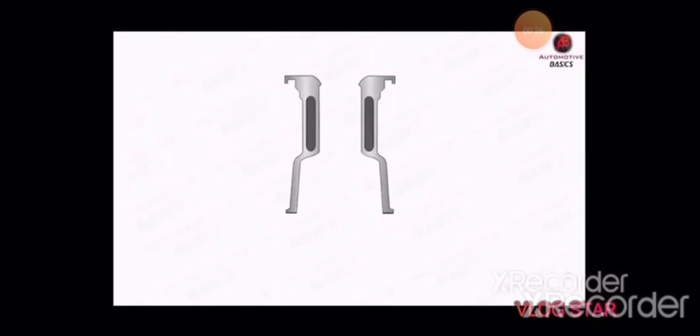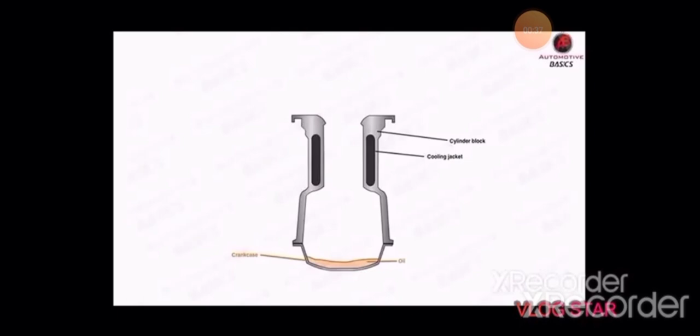First of all, understand the components of the diesel engine. Here you will observe there is a cylinder block, cooling jacket. Beneath there is the crankcase, which is filled with oil, also called the oil sump. Then is the cylinder head, which covers the cylinder block airtight.

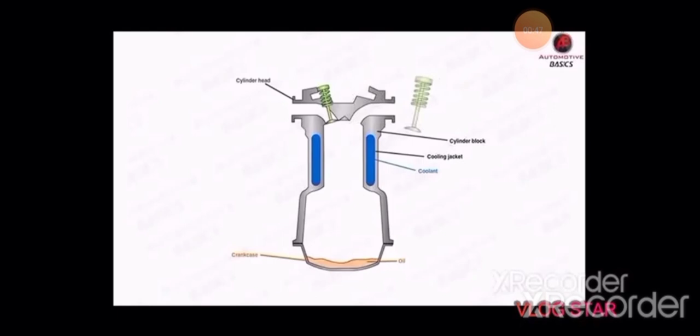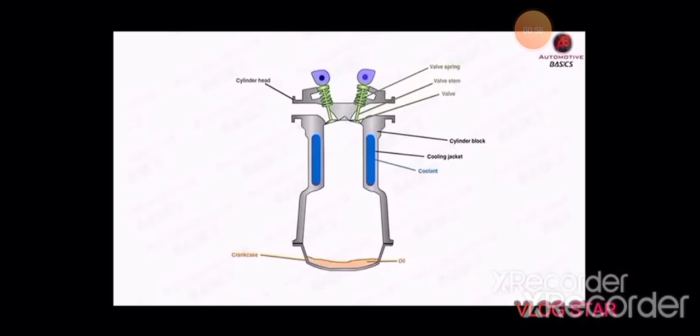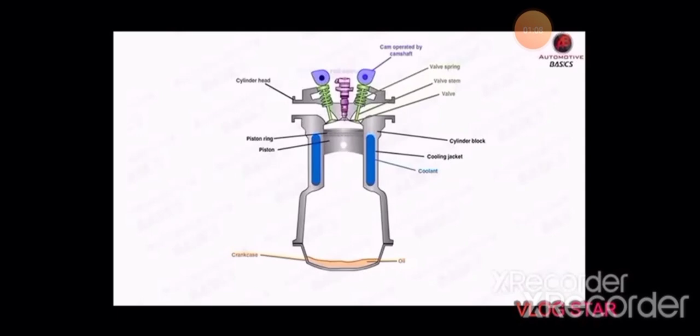Then there are two valves. The first is termed the inlet valve and the other is termed the outlet or exhaust valve. It is driven by the camshaft, which is operated with the help of the crankshaft. Now this body, called the piston, has piston rings. There is a fuel injector at the top of the cylinder head, and an injector nozzle is there.

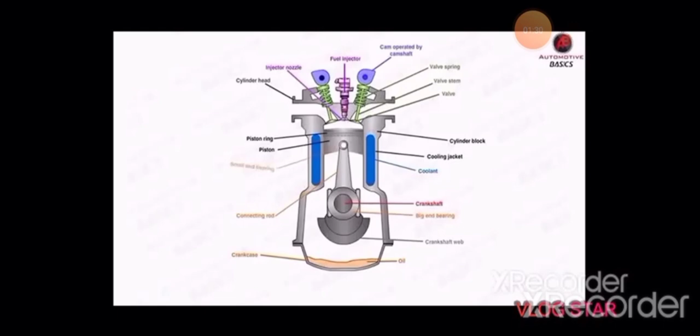Then comes the crankshaft, that is the crankshaft web. This moves and regulates the rotation of the crankshaft. Now this is the connecting rod. The big end is connected to the crankshaft and the small end is connected to the piston with the help of the gudgeon pin, also called the piston pin.

Then is the TDC and BDC. The TDC is termed the top dead center and the BDC is termed the bottom dead center. There is the combustion chamber and the exhaust port. Now this is the basic components of any diesel engine.

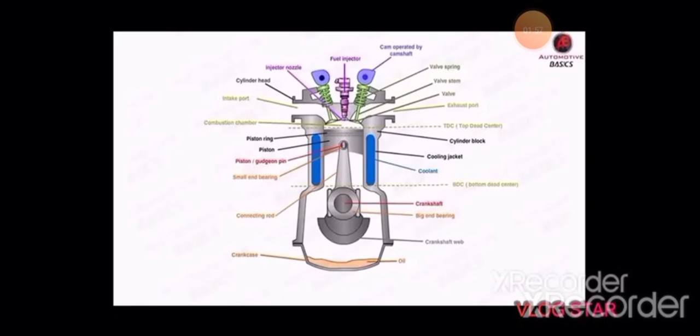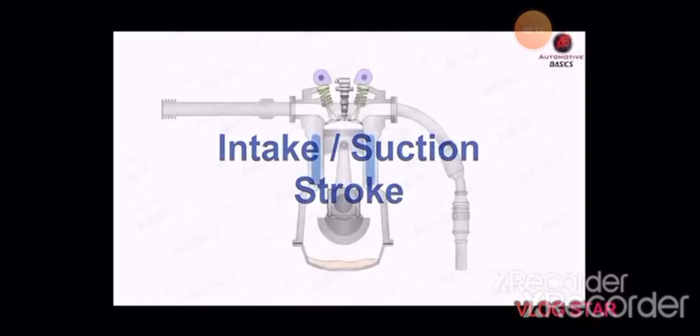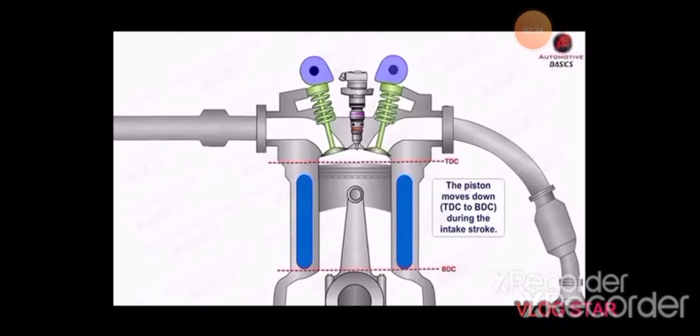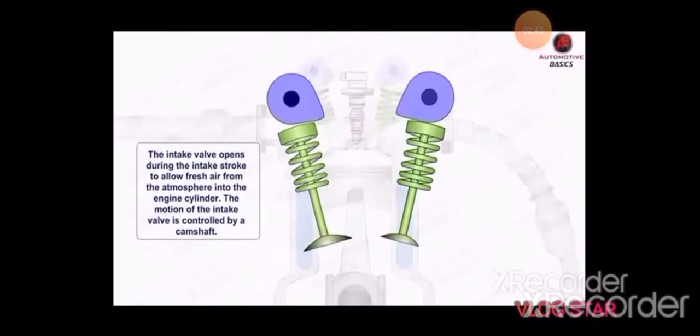The piston moves down from TDC to BDC during the intake stroke. During this stroke, the intake valves open, as you can see here in the video. You'll observe that the intake valve opens up, allowing the gases to pass. The intake valve during the intake stroke allows fresh air from the atmosphere into the engine cylinder.

The motion of the intake valve is controlled by the camshaft, and this camshaft is connected with the crankshaft with the help of timing gears. Similarly, the exhaust valve remains closed during the intake stroke, and this exhaust valve is controlled by the camshaft, which is controlled by the timing gears attached through the crankshaft.

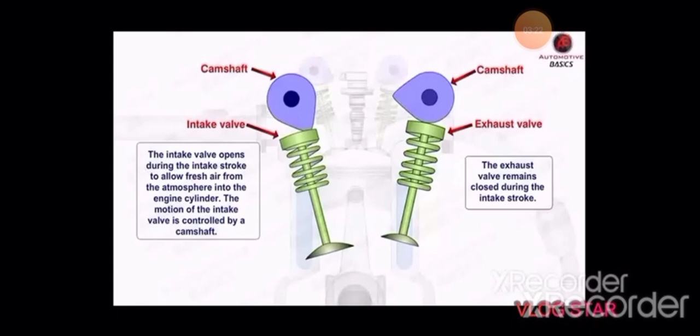As you can see here, both valves have springs. These springs are termed the valve springs. They are there to move the valves easily as per the movement of the camshaft.

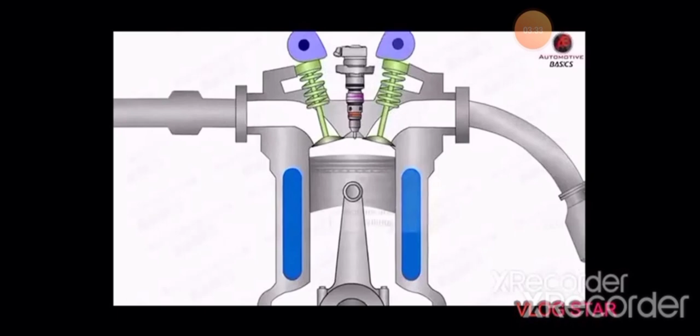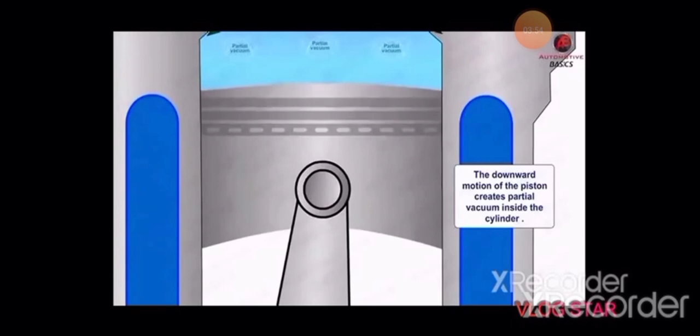Now see, as this intake valve opens, the downward motion of the piston creates partial vacuum inside the cylinder. As you know, the vacuum is to be filled by gases or fresh air. So this partial vacuum is actually sucking the outside air, also termed the charge, towards the engine cylinder.

Now the combustion chamber has less pressure, and thus the pressure difference generated from the downward motion of the piston pulls the air molecules into the cylinder. These molecules move with the help of the piston, filling up the cylinder block. The piston moves down until the BDC is reached.

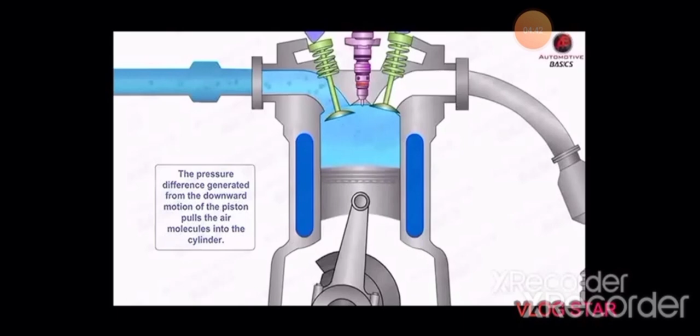You can observe the cylinder block has coolant inside the cooling jacket. These cooling jackets actually maintain the temperature of the engine cylinder. Otherwise, there will be a very high temperature up to 1600 degrees centigrade.

Now, as the charge of air is filled, the intake valve closes at the end of the intake stroke. The end of the intake stroke takes place when the piston reaches the bottom dead center, that is the BDC. Now you can observe the fresh air is filled between the TDC to BDC, that is the combustion chamber is filled with fresh air.

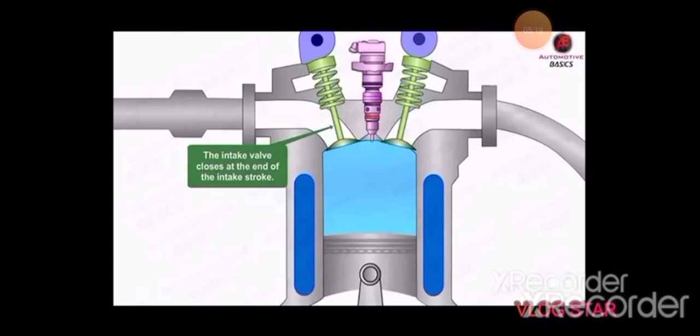Now the piston starts to move upward. When it is moving upward, the next stroke starts, that is the compression stroke. The compression stroke is actually very important as it is compressing the air present inside the combustion chamber. The piston moves from BDC to TDC during the compression stroke.

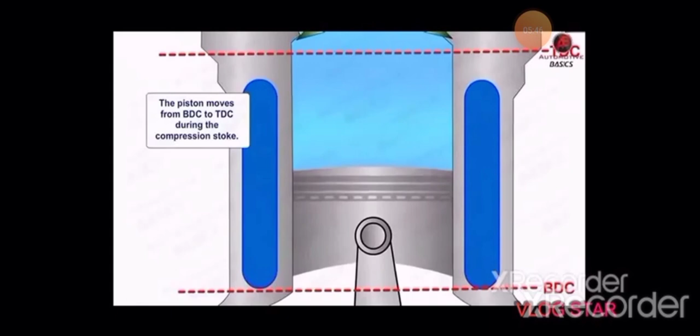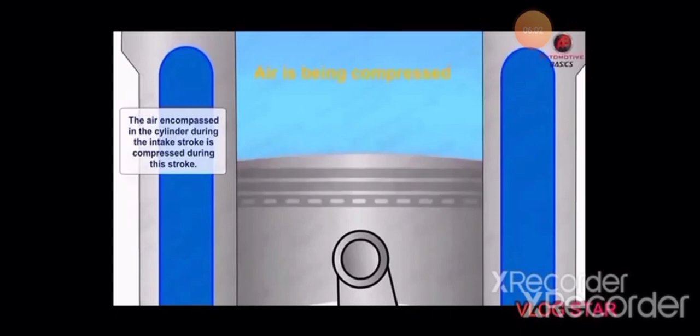The charge taken into the cylinder is compressed by the piston during this stroke. The entire charge of the cylinder is compressed to a small volume contained in the clearance volume of the cylinder. If only air is compressed in the cylinder, as in the case of a diesel engine, the fuel is injected at the end of the compression stroke. The ignition takes place due to high pressure and temperature.

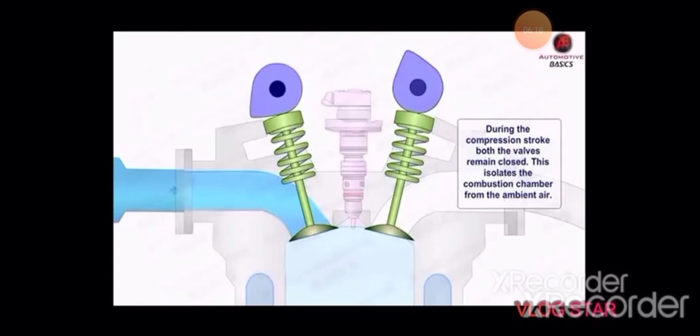If the mixture of air and fuel compressed in the cylinder is ignited, after ignition a tremendous amount of heat is generated, causing very high pressure in the cylinder. During the compression stroke, both valves remain closed. This isolates the combustion chamber from the ambient air.

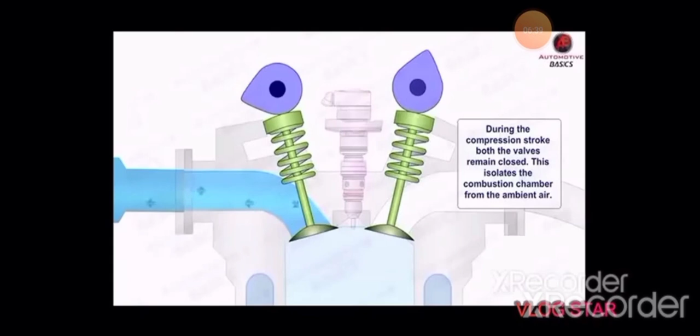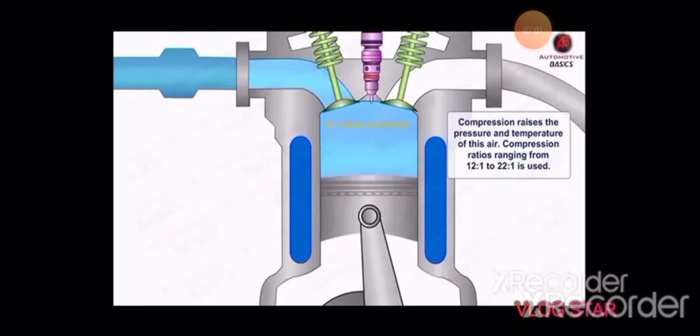You can observe that during this stroke, there is no inlet valve open. The compression rises, and the pressure and temperature of the air is again rising. The compression ratio ranges between 12:1 to 22:1, sometimes ranging from 14:1 to 22:1. Now, as the air is being compressed, the compression stroke is taking place.

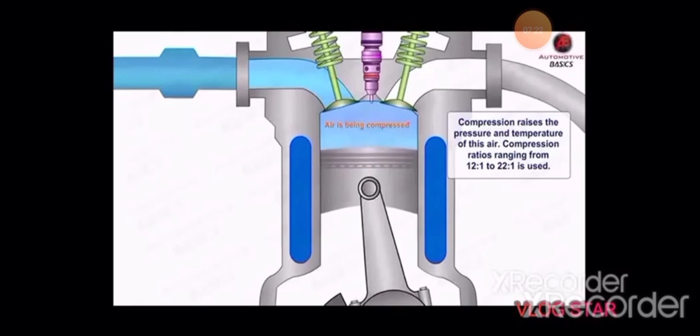There are certain special features as the engine has high compression ratio ranging from 14:1 to 22:1. During the compression stroke, the engine attains high pressure ranging from 30 to 45 kg per centimeter square.

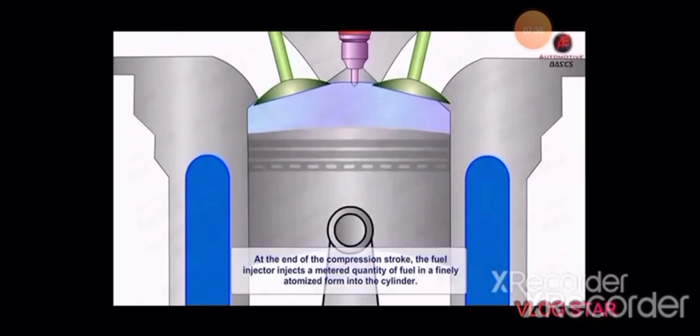At the end of the compression stroke, the fuel injector injects a metered quantity of fuel in finely atomized form into the cylinder. It has very high pressure ranging from 120 to 200 kg per centimeter square. The ignition takes place due to heat of compression only, there is no external spark in the diesel engine.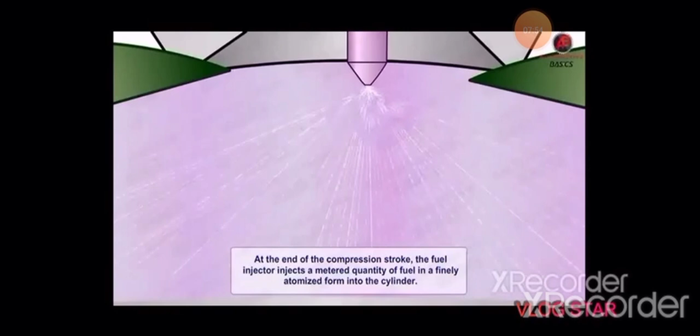The diesel engine has better knocking resistance and thus the power stroke starts. During the power stroke, the high pressure developed due to combustion of the fuel causes the piston to be forced forward and backward at regular intervals of time.

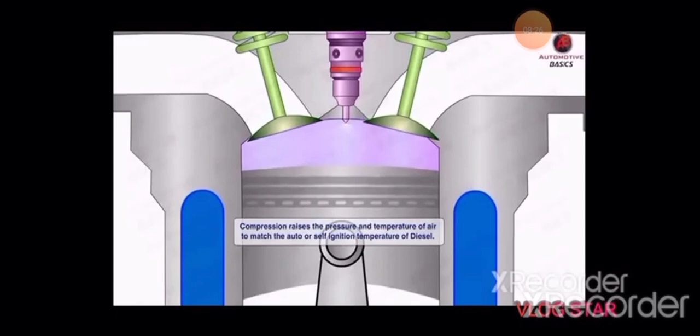The compression raises the pressure and temperature of the air to match the auto or self-ignition temperature of the diesel. The connecting rod, with the help of the crankshaft, transmits the power to the transmission system.

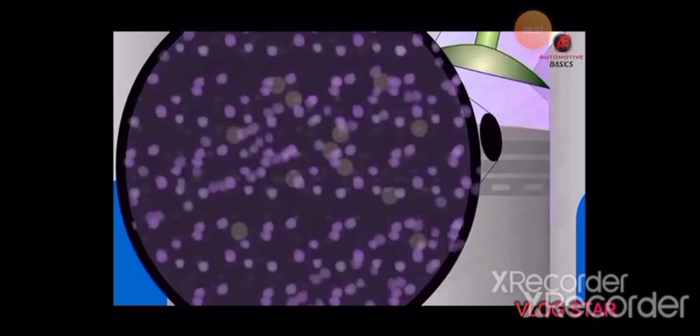You can observe here there is a charge of fresh air and atomized fuel, that is diesel in atomized form. These fuel molecules absorb heat from the surrounding hot air and vaporize, resulting in combustion and the subsequent generation of energy. You can observe the yellow droplets of atomized fuel are very volatile and highly ignitable in nature.

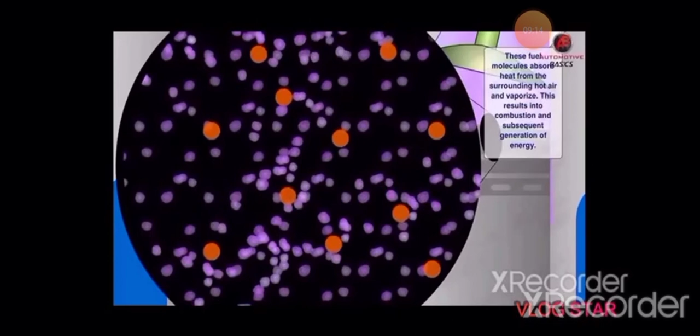So when this charge is fed in, it starts the power stroke and begins to combust easily. Both valves are closed during this stroke.

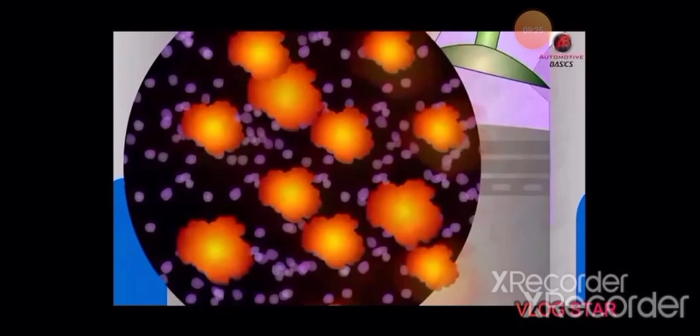Now the combustion starts, as you can see in the figure. During combustion there is a tremendous amount of heat produced, sufficient to start the mechanical work of the engine. The combustion of the fuel generates energy.

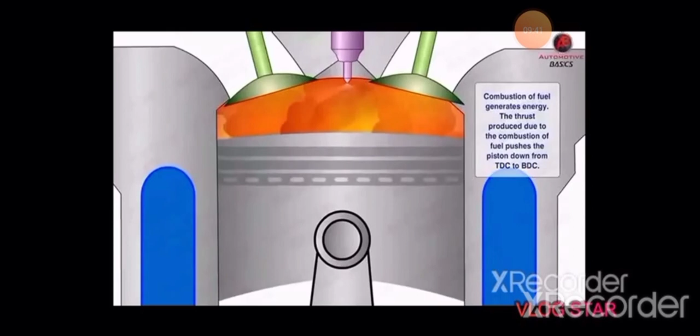The thrust produced due to combustion of the fuel pushes the piston downwards from TDC to BDC. When the piston is at the top of its stroke, it is said to be the top dead center. When the piston is at the bottom of its stroke, it is said to be the bottom dead center.

In a two-stroke cycle engine, both sides of the piston are effective, which is not the case in a four-stroke cycle engine. Now, while talking about the diesel engine, the basic elements of the diesel engine are the same as in case of the spark ignition engine, but the method of fuel introduction and ignition are different to a great extent.

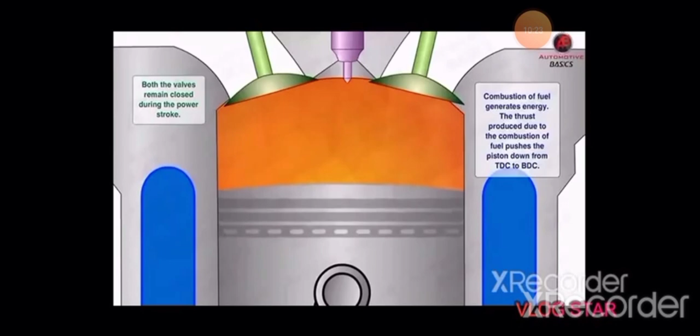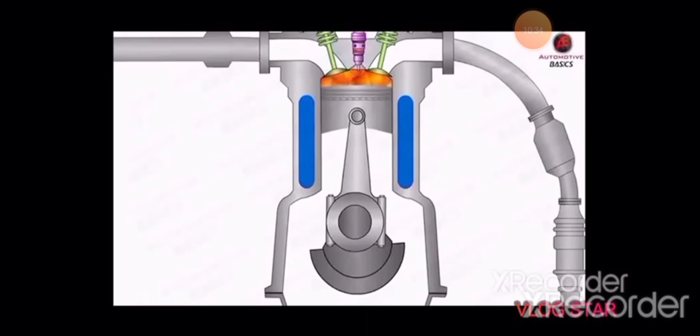As you can see here, at the end, ignition of fuel takes place due to heat of compression. The diesel engine is equipped with a fuel injection pump and injectors. The injectors protrude into the combustion space of the engine.

This downward movement of the piston provides positive driving energy to rotate the wheels, and during this, driving energy is channeled to the wheels through an array of complex mechanical parts.

For operation of the diesel engine, the piston is placed inside the cylinder and it is attached to the crankshaft through the connecting rod. The piston moves upwards and downwards, and this up and down motion of the piston is changed into rotary motion of the crankshaft by the connecting rod.

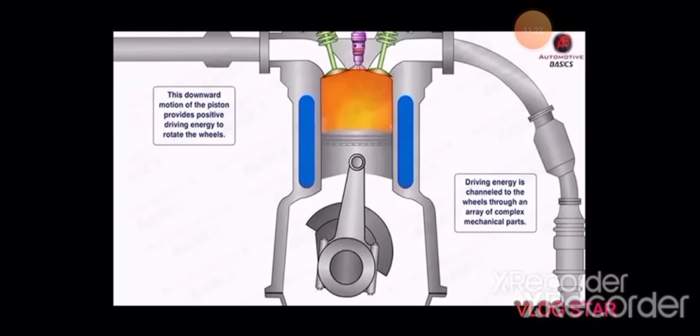The flywheel is attached to the rear end of the crankshaft. This makes the shaft revolve uniformly when the engine is running. The cylinder is tightly closed at the top by the cylinder head.

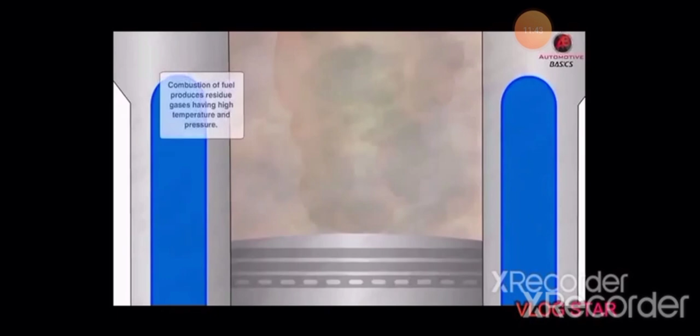The combustion of the fuel produces residue gases having high temperature and pressure, and this exerts the exhaust stroke. As we talk about the exhaust stroke, combustion of the fuel produces residue gases having high temperature and pressure, generating different types of burnt gases.

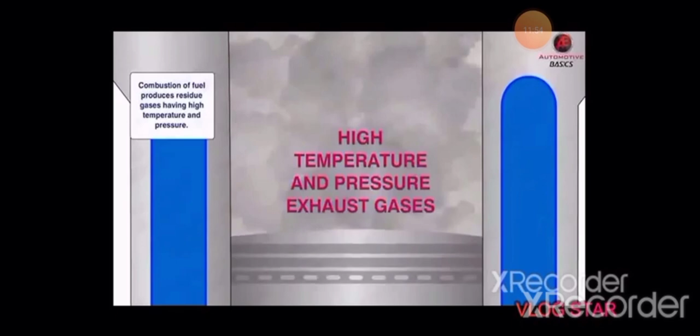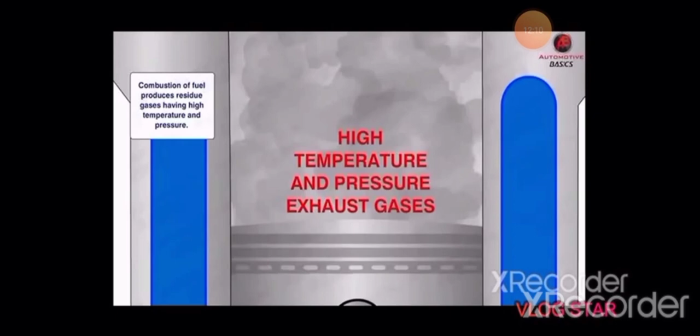The exhaust gases go through the exhaust valve during this stroke. All the burnt gases go out of the engine and the cylinder becomes ready to receive a fresh charge. The inlet valve is closed and the exhaust valve remains open during this stroke. Thus it is found that of all four strokes, there is only one power stroke and three idle strokes.

You can see here the gases are composed of unburnt fuel particles and a number of harmful pollutants like carbon monoxide, carbon dioxide, nitrogenous oxides like NO2, NO3, hydrocarbons and sulfur oxides, which are very poisonous in nature.

So all these gases can wear and tear the inner lining of the cylinder. Thus it is very important to move out all these gases through the exhaust valve.

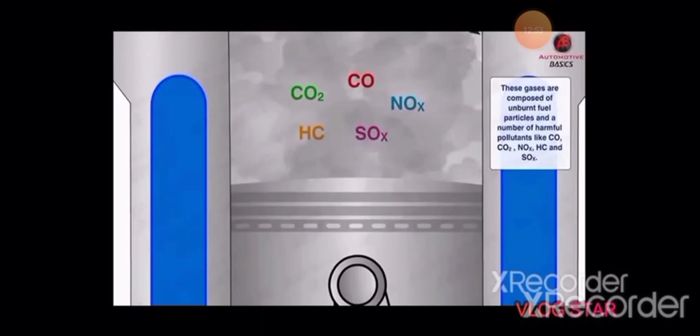The piston starts to move from BDC to TDC during this stroke, and the upward movement of this stroke causes the movement of the exhaust gases outside, as shown in this video.

You can observe here the intake valve remains closed during the exhaust stroke and the exhaust valve opens during the exhaust stroke. This allows smooth disposal of all the gases into the exhaust port and further downward to the exhaust system.

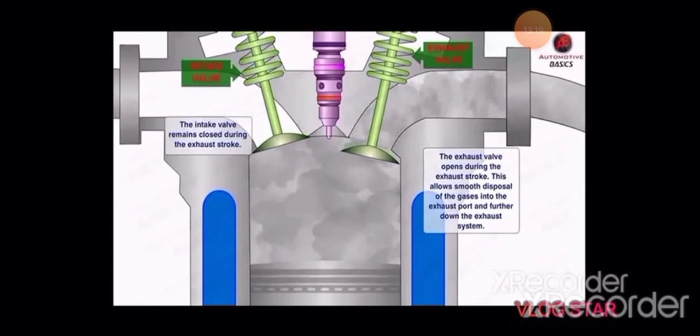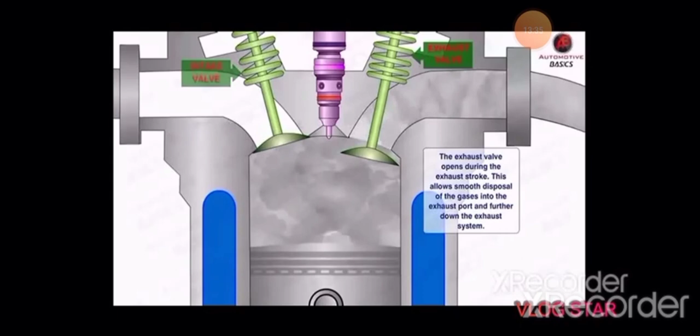As you can observe here, all the residual gases, the unburned gases, are moving out. It is very important to get all these gases outside the combustion chamber, as if it remains inside, it will cause great harm to the cylinder.

The upward motion of the piston and the pressure difference between the cylinder and atmosphere drive the exhaust gases out during this stroke. You can see it going through the exhaust system.

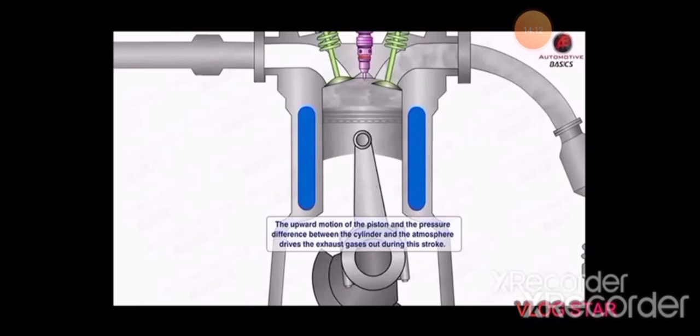Now observe, while the piston is moving upwards, it is exerting pressure to move all these gases out from the exhaust port, and still the intake valve remains closed. Then it comes to the muffler.

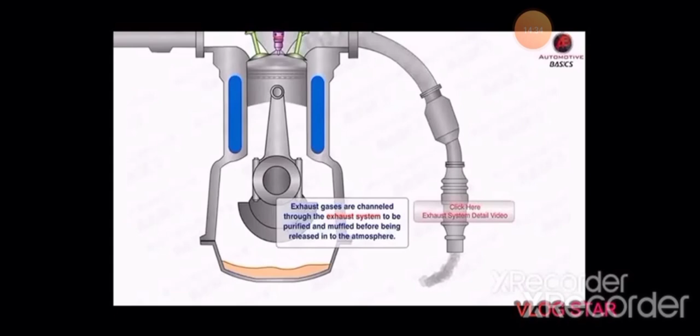You can see the exhaust gases are channeled through the exhaust system to be purified and muffled before being released to the atmosphere. The exhaust system plays a very vital role in moving out all the residual gases so that there is no carbon deposit on the cylinder lining.